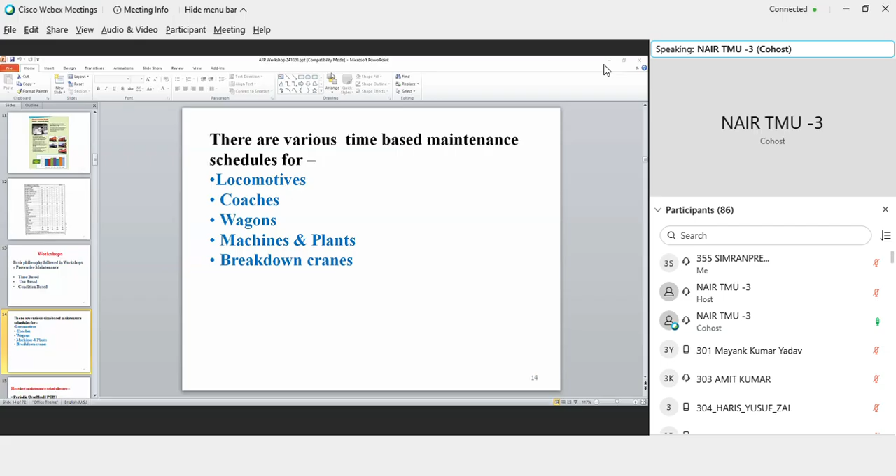The attention which is given during that period of time is much more than what can be managed in open line. Now, the basic premise is if the attention given in the workshops is good or it is at a higher level, then the open lines would face lesser level of problems because they don't have that much of time to attend to those repairs. If the maintenance which is being done in the workshops is not up to that quality, then the open lines will keep on having recurrent problems.

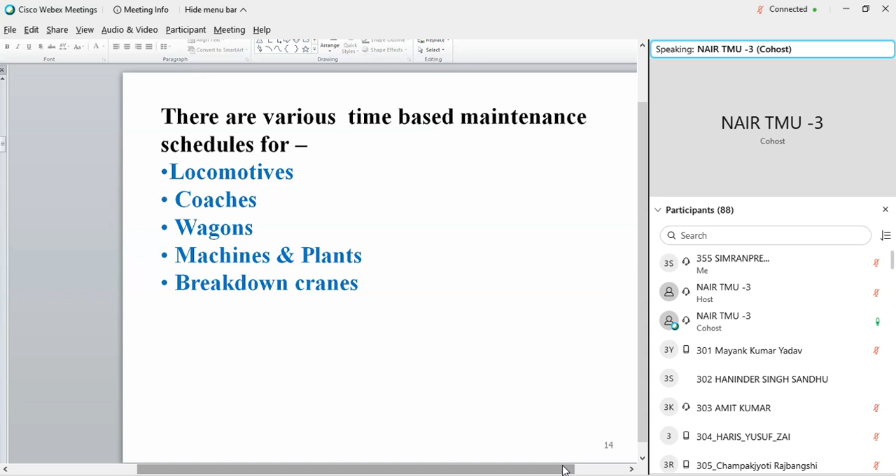Now, the workshops can be workshops dedicated to locomotive POH activities, coaches POH activities, or wagon POH activities, or it can be a mix. So, for example, Pratap Nagar workshop is a workshop which is dedicated to wagon repairs. You go to Secunderabad, the Lallaguda workshop is a workshop designed for coaches. Vijayawada, which is Rayanapadu, is designed for wagons. It can be a mixed workshop.

You go to Charbagh in Lucknow, you will find they do coaches, they also do POH of the electrical locomotives, the POH of DEMUs or EMUs also. So the workshops can be mixed or workshops can be specific, dedicated to a type of a rolling stock. There is a workshop, say Parel, which was dedicated only for POH activities of breakdown cranes.

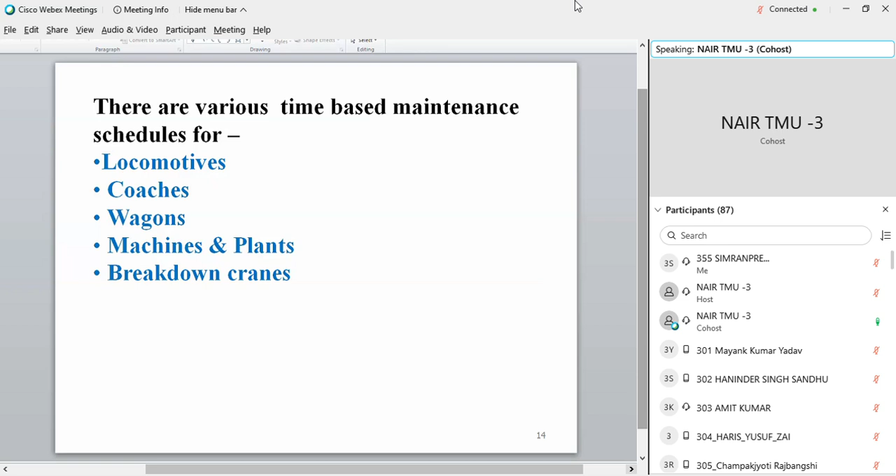Now the workshops are the places which also use a large level of M&P. So that is why I have written here M&P separately. They use M&P for their own use, and they also provide support for M&P maintenance for the adjoining division if it is there. So we do periodic overhaul and midlife rehabilitation in these workshops.

The workshops at the zonal level are headed by a person called CWE, or the Chief Workshop Engineer. If you remember the headquarters structure which we had discussed, there is a gentleman called PCME who is the head of the mechanical department. Under him, there is one gentleman called CWE, or the Chief Workshop Engineer. So say for example, Western Railway has a workshop at Pratap Nagar, there is a workshop at Bhavnagar, there is a workshop in Parel. So all these three workshops are coordinated by the CWE, who is sitting in the headquarters. Their day-to-day maintenance activities, any material support required, any policy decision required would be given by the CWE. At the workshop level, the head of the workshop is a CWM.

So there would be a Chief Workshop Manager at Pratap Nagar. There would be a Chief Workshop Manager in Bhavnagar. He is the man who is the head of the workshop at the workshop level. Now, the Chief Workshop Manager in turn has a large number of officers who are supporting him. So there may be a Deputy CME production. If it is a crane workshop, a Deputy CME crane, Deputy CME M&P. If it's a diesel workshop, Deputy CME diesel. Deputy CMM depot. The workshops use a large amount of material and they generate a lot of scrap. So you will find that major workshops are attached with stores depots.

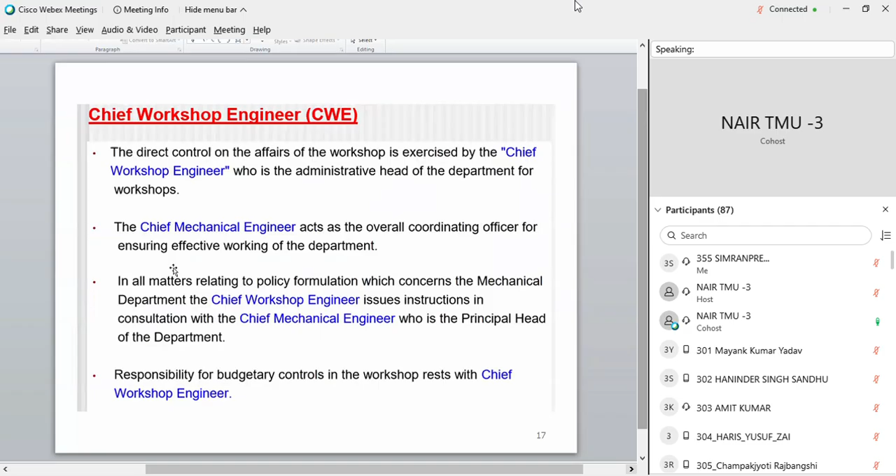So this is what the CWM does. The CWM is the in charge of the workshop, and a number of these basic activities keep on happening in the workshops. They may be repairs, manufacturing, M&P maintenance, production control, support staff of stores, electrical, accounts, personnel. So CWM is generally a big man.

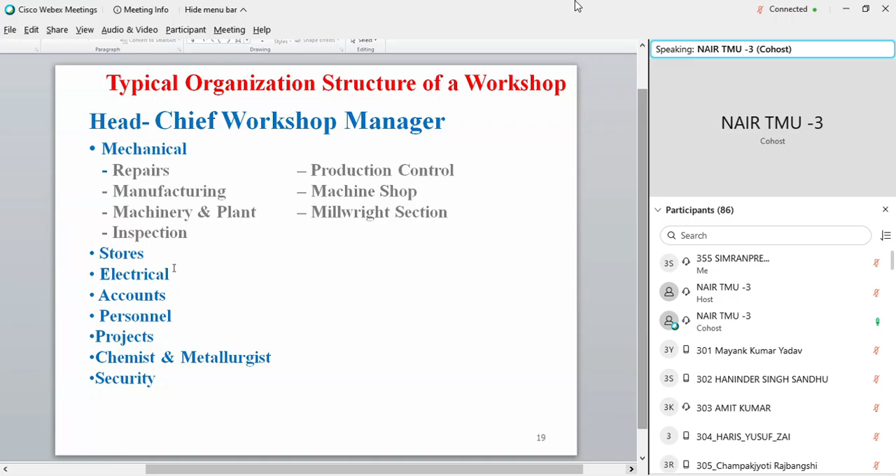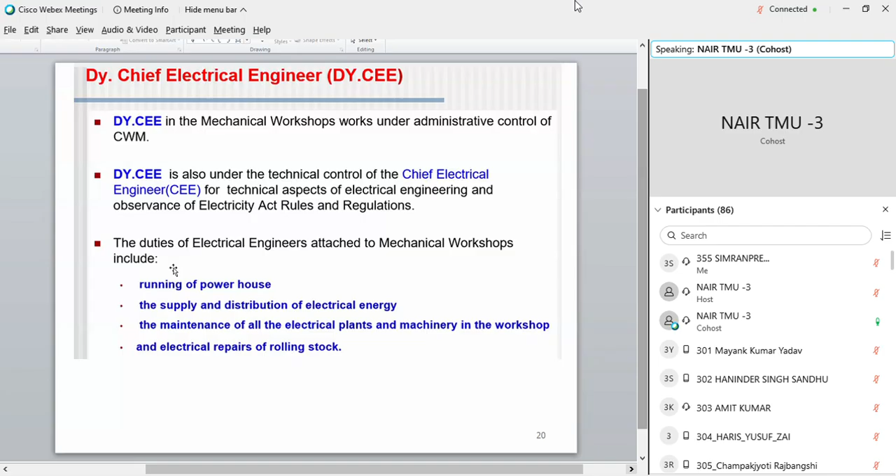CWM is conventionally an SAG grade post, and you will find that a large amount of activities are happening in the workshops, and different departments are assisting him. So there may be a deputy CEE who's posted in the workshop, and besides the general lighting, for example, in Charbagh workshop, if the electrical loco maintenance is being done, he would be assigned some work of the electrical loco maintenance also. The personnel works which are done by the personnel department, all establishment related matters.

Chemical and Metallurgical Testing Organization. This is a subsection of the mechanical department only, and this is a separate cadre per se. So there would be a CMT cadre across all the workshops. Not all workshops would have CMT organizations, but the major workshops would have CMT organizations.

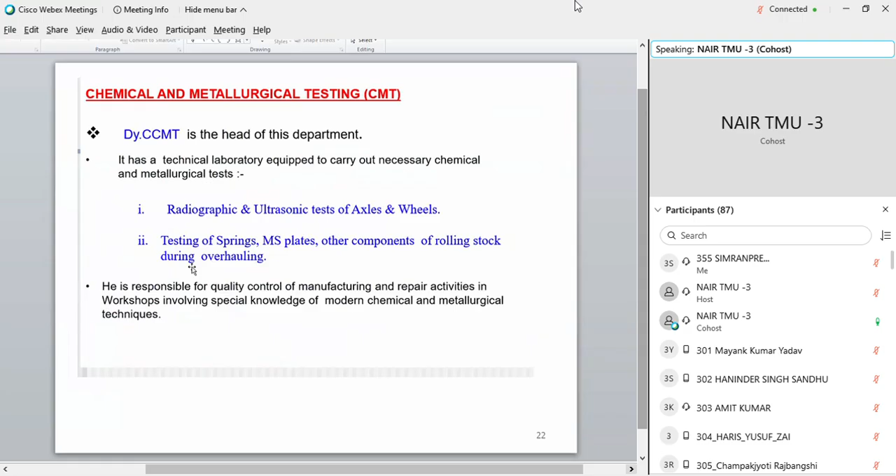There would be an accounts department, basically looking after the pay related issues of the people there, and also doing the costing activities in the workshops. Stores organization taking care of the material input, scrap sales which happen in the workshops. Union activities are, as I told you, they are hotbeds of union activities. Now workshop is divided into small shops.

So let us take an example of Pratapnagar workshop again, which is a wagon repair workshop. When you enter Pratapnagar workshop, you will find that there are a large number of small shops. So for example, if a wagon comes in, there may be a body repair shop, a shop which is only attending to the body repair. There may be a bogie shop, which is only attending to the bogie repairs. There is an air brake shop, which is attending to the air brake components. There is a cartridge roller bearing shop, which is attending to the axle boxes.

There is one M&P shop, which is attending to the M&P which is available in the workshop itself, or some small process of machining which is required to be done. So the whole workshop is divided into small shops, and each shop is headed by a senior supervisor or a senior section engineer who is supported with junior engineers, artisan staff, khalasis under him.

And the day-to-day maintenance of that specific shop has to be run by that senior supervisor. Again, the shops also are numbered because we have to attribute costs of activities which are happening in that specific shop to that shop only.

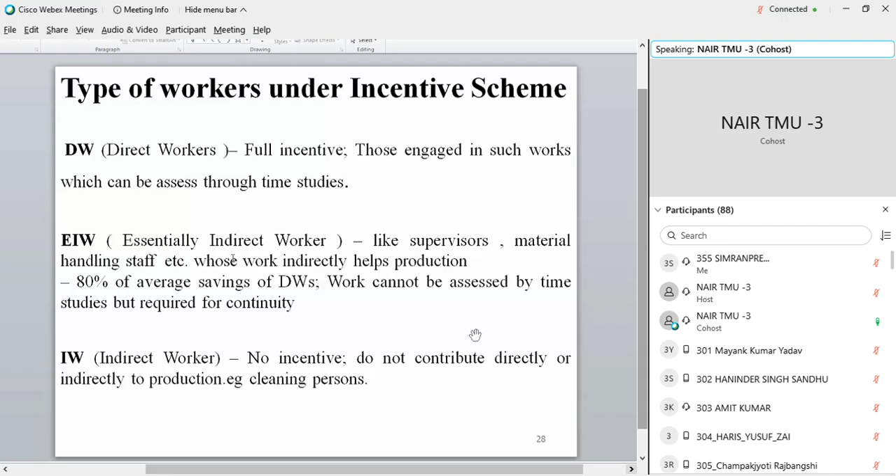The workshop would have something called a production control organization or a PCO, which is the most important section, and it is controlled by the production engineer or the deputy CME production. He is the man who is primarily responsible for ensuring that the production activities are happening in the workshop. There would be an M&P section basically looking after the M&P maintenance, and the balance whole workshop is divided into various shops which are controlled by individual senior section engineers. All the workshops are codified.

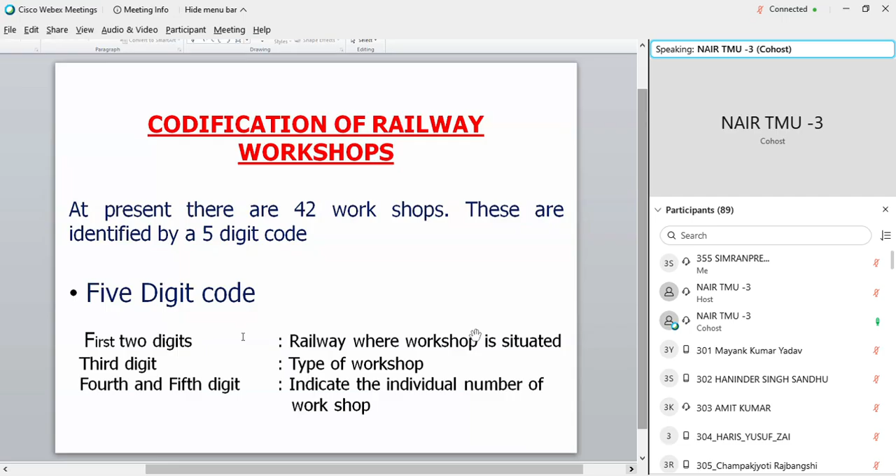This we just saw in the wagon PPT also. There is an organization called COFMO, Central Organization for Modernization of Workshops, which was set up in Delhi. The basic concept was that we wanted to modernize all our workshops. So a separate entity was created to give this input. Over a period of time, all the workshops have got modernized.

So this entity has diversified into procurement of M&P, because procurement of M&P is also very tricky business, and we wanted an organization who was competent to purchase M&P for use of Indian Railways. So COFMO was given this task of procuring M&P for the Indian Railways.

Now, PCO, I told you, is one of the most important sections in the workshops, and the production engineer is responsible for the PCO. And these are some of the sections which are covered under the PCO organization. So there is a progress office, there is a planning office, there is an inspection office.

Let us take an example that one Pratapnagar workshop has been told that you have to manufacture a design of a table and 100 numbers of that table. So once that demand has come on Pratapnagar workshop, what the PCO would do, they will make a drawing. So the workshops have drawing staff attached with them. They'll make a drawing, they'll make the specifications of the material which is required, and they'll issue this drawing.

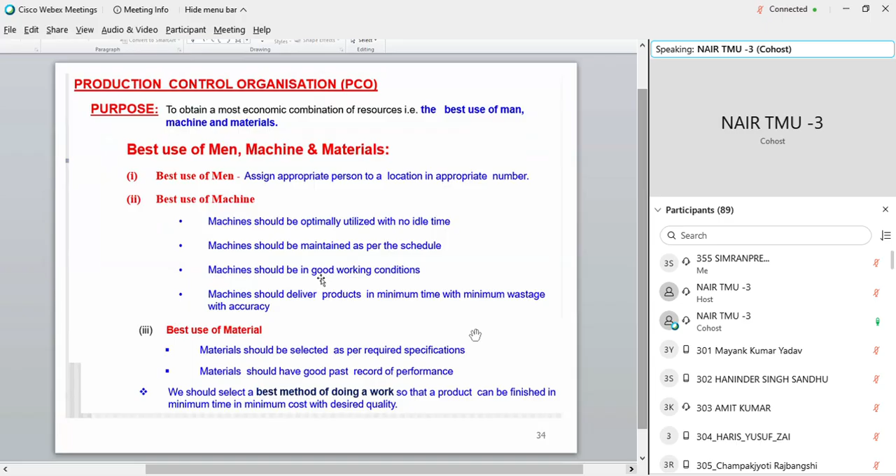So he basically ensures best use of men, machine and material. These are the main functions of the progress office. Issues a card number, specifies a date of completion,

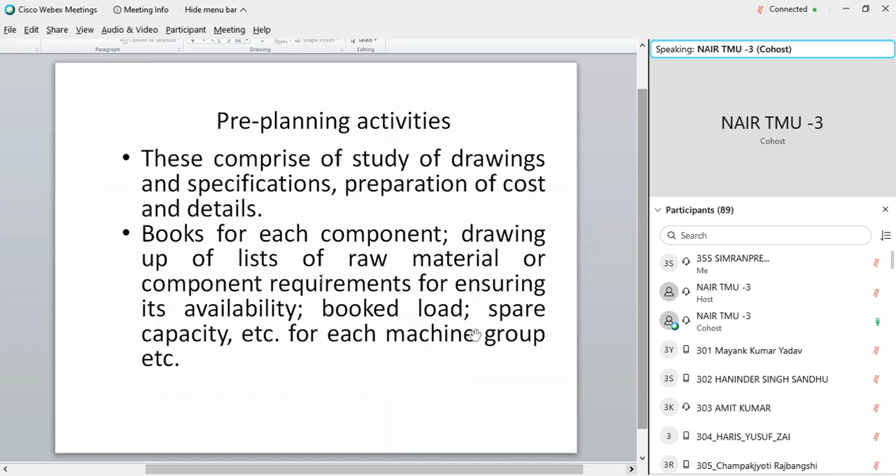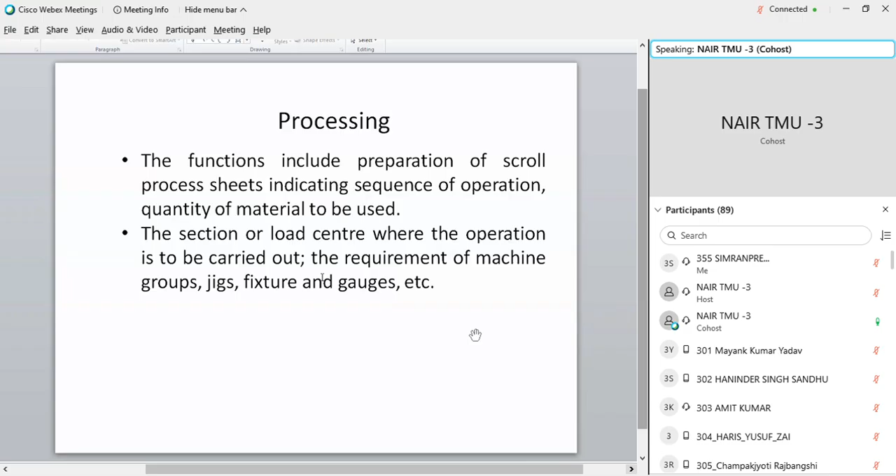pre-planning activities, studies, drawing and specifications, drawing office activities where he is issuing the drawing, planning activities, composition of activities where he is fixing rate, where he is fixing time, synthetic time he has fixed, then he does efficiency studies to establish whether the time he has fixed is okay or not. So these are broadly the activities which are happening in the PCO.

Then the next section, which is an important section, is the M&P section. In this section, basically, he looks after the procurement of all the M&P which is required in the workshop. We procure machinery in Indian Railways through a program called M&P program. And this section would be placing the demands under the M&P program.

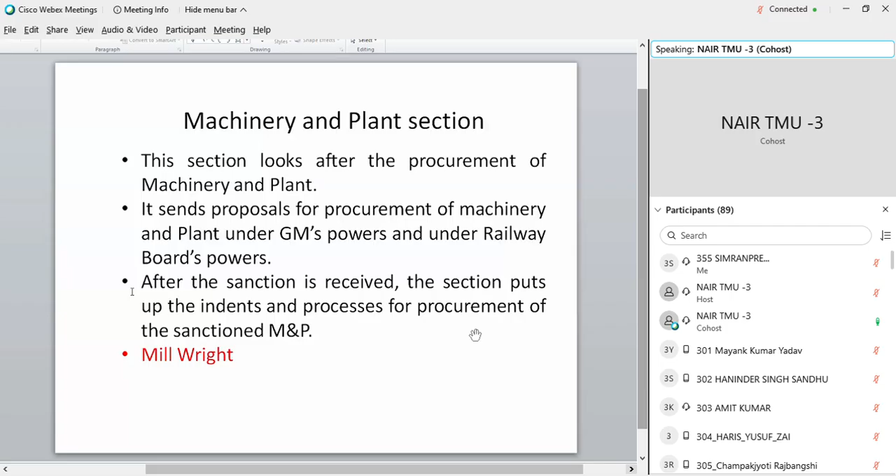We also have a section called millwright section. It's a name conventionally given to a section because they are involved daily in the maintenance of the M&P activities. It is thought their competence level is higher. So assuming in an associate bridge shop or in an electric loco shed, the overhead crane has gone under repair. So they will request the millwright section of the closest workshop, that look, you send me your millwright staff to attend to my EOT crane.

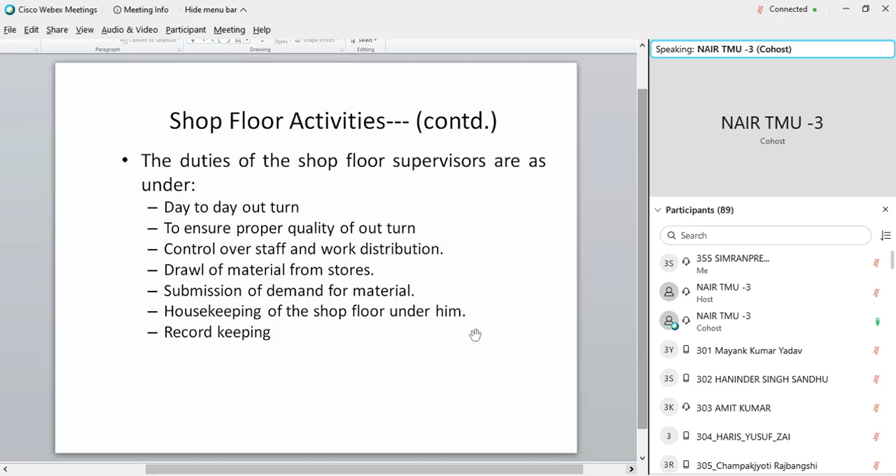Plus the shop floor activities where the SSEs are managing on a daily basis the day-to-day operations, what is the day-to-day outturn which needs to be given, whether the quality of the outturn is proper, control over staff and drawl of materials, etc.

Now each workshop, when you enter a workshop, you will find there is a time office. Time office is where the attendance of the staff is maintained. So they are supposed to punch in a card and punch out a card. We have tried to automate it by using biometrics, but this concept has not been very much liked by people, because once you have to go in for biometric attendance, you have to be available in the workshops.

So Pratap Nagar is one workshop which has been successful in implementing biometrics at all the 4 times of the day. This is a step in workshops when you're dealing with 3,000 people. Any decision, you have to take 2 steps forward and 1 step back. It's an activity in process. Some workshops have come up to the level where they have said that at least you do biometrics at the morning time of the day.

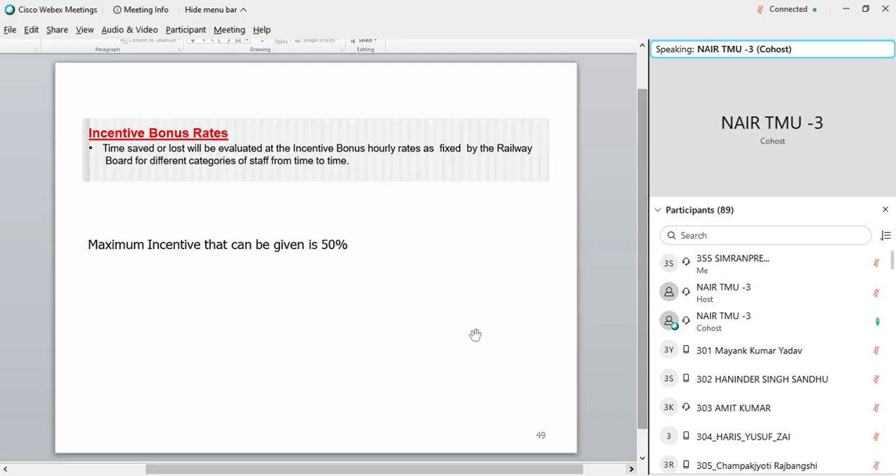Now, I told you that all the workshops get incentive. The maximum incentive that can be given is 50%. Incentive is in terms of money. All the workshops are covered under an incentive scheme, and a worker can earn maximum incentive of only 50%.

This was the logic as to why the incentive scheme was launched over Indian Railways. The workshops were told that you increase your productivity, we will not give you additional manpower, but you start giving me more output. The worker has the benefit that if he works slightly better, he gets more money. The basic logic in incentive scheme is that his basic wages are assured. So his basic wages will always be assured, and if his productivity improves, he starts earning more money in terms of incentives.

Now there are 2 types of incentive schemes over Indian Railways. One is called the Chittaranjan type incentive scheme, and second is called the group based incentive scheme. Chittaranjan based incentive scheme was the first scheme which was launched in 1960 in Chittaranjan, and basically again the principle is time. So there is something called allowed time. We have a method by which we fix an allowed time, and we see what is the time taken, and the time saved is what gets converted into incentive.

Now, what happens in the workshops? The misuse happens while fixing the allowed time. So you have to keep a watch on the allowed time which has been fixed for an activity. Say, for example, I had given 4 hours for an activity where 4 buffers needed to be dropped. They had to be overhauled and they had to be refitted back. Over a period of time, this activity got changed, and I am now getting overhauled buffers from the market. I simply have to drop and fit.

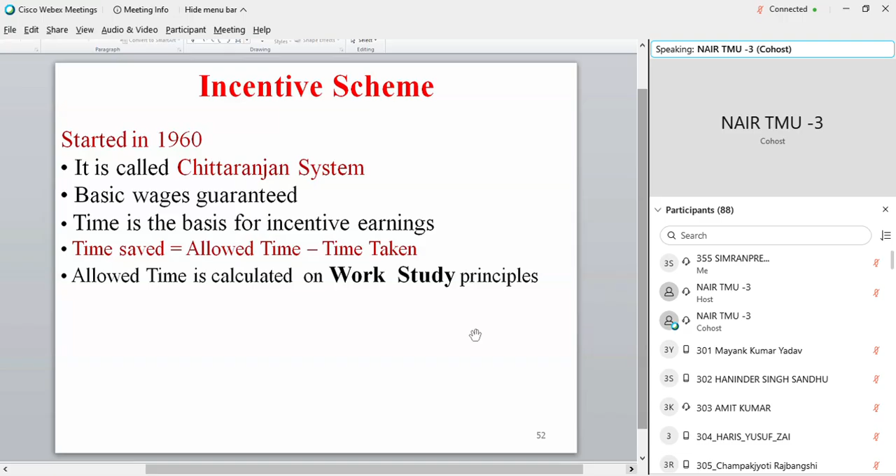The Chittaranjan scheme was the first formal scheme, and the Chittaranjan scheme is an individual-based scheme. So for example, in that example of shop 1, shop 2, shop 3, if the shop 1 fellow is saving a lot of time and the Chittaranjan scheme is applicable, then he is earning money. The item has gone to shop 2, and the shop 2 fellow is not earning incentive, is not saving time. So what will happen? In totality, even though I have ended up paying incentive, the outcome or the productivity of the workshop as a whole has not improved.

So because of that, a group incentive scheme was launched where it was said that we pay you incentive only when as a group the outcome improves. So in the Chittaranjan pattern, if the shop 1 fellow is doing a good job, he will earn incentive independent of what the shop 2 or the shop 3 fellow is doing. In the group incentive pattern, only when shop 1, shop 2, shop 3 fellows as a group have improved the productivity will they earn incentive, otherwise they will not earn incentive.

Now, the allowed time we give for a component is fixed in such a pattern that an average good worker will end up getting 33 1/3% of the incentive. So the allowed time has that much of a gap that if an average worker is working and using that allowed time, he will be able to earn 33 1/3%.

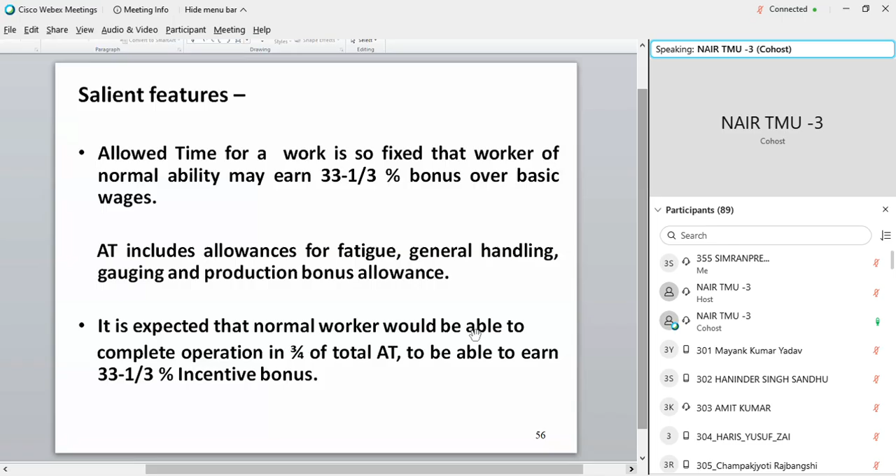In the process, when we fix allowed time, there are some allowances which are given. The allowances can be fatigue allowances, general handling allowances, gauging allowances, and he is also given the flexibility to book idle time. If he is idling for non-availability of tools, or there is a power cut, or the machine has a breakdown, he can book idle time also. So the worker is not penalized in any way that he is not able to earn incentive.

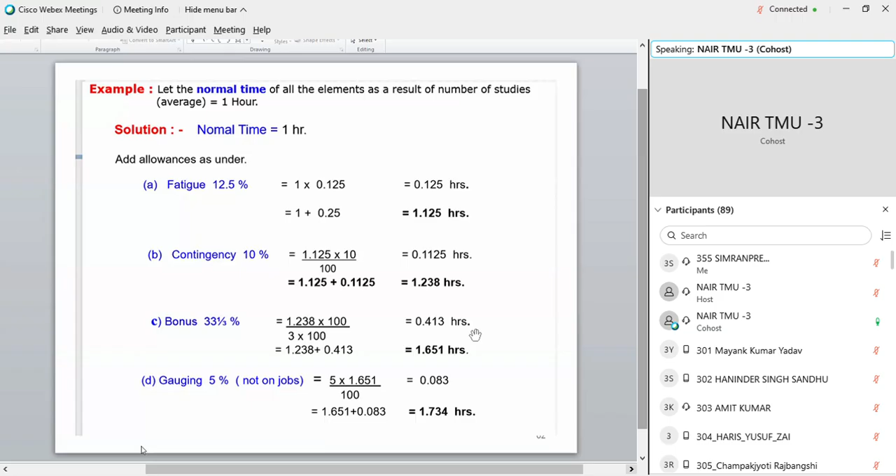Now, this is the group incentive scheme which was introduced in the workshops after a study by RITES, and subsequently this group incentive scheme has been implemented in all the workshops. This is a worked example of how we fix the allowed time. Assuming the normal time taken for the component is 1 hour, we'll introduce some percentages for fatigue, some percentages for contingency. Bonus means the incentive which has already been built in. Gauging on the job is the gauging activity being done. And the allowed time for this job is, say, 1.734 hours.

We know that with this allowed time, an average worker would be able to finish it in 3/4 of the time. And he would be able to save 0.433 hours, so that his average incentive earning would be 33 1/3%. If he is a good worker, he can save more time, but the maximum limit of time saving permitted is 50%. We do not pay more than 50% incentive. So this is the worked example from which you can get an idea of how we fix the time so that an average worker will always end up earning 33 1/3% of the money as incentive.

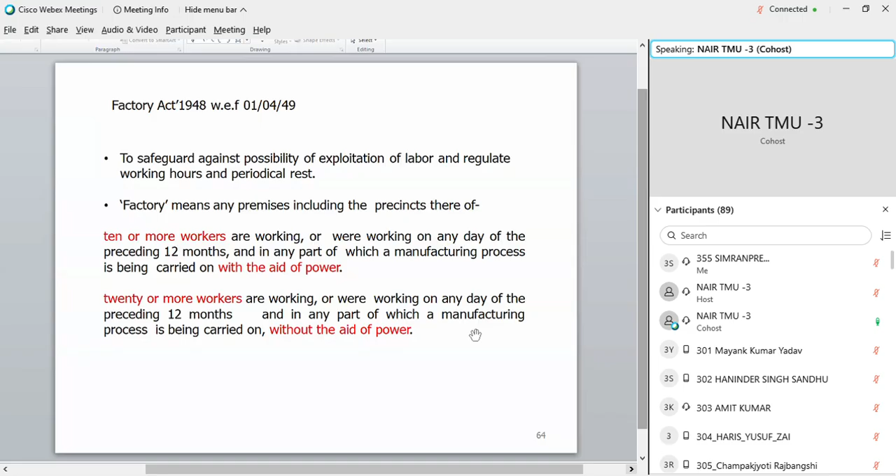Now the workshops are covered under the Factories Act. The Factories Act stipulates that the CWM is the principal occupier of that factory. So if anything unusual happens inside the factory, the CWM is directly responsible. For example, in the Rayanapadu workshop in Vijayawada, a compressor burst and 2 people died. So the state factory inspector gave a legal notice to the CWM asking why action should not be taken against you as an individual, because you are the principal occupier of this premises and such an unsafe operation has happened in your premises. So under the Factories Act, the CWM is the occupier of the factory or the principal employer of the factory.

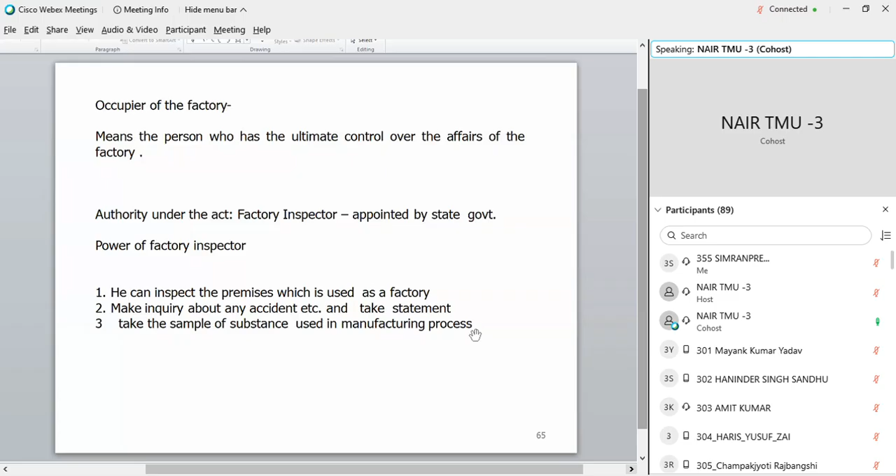Also in the workshops, we do costing of the components. For example, again taking that table, there are direct material and direct labor costs. Beyond that, there are some overhead costs, also called on-costs.

You will see that a table which is costing outside in the market 1,000 rupees, if you manufacture it in a railway workshop, it is priced at 1,700 rupees. So that 700 rupees is overheads, and there are various overhead costs which come into play.

Because of the high overhead costs, the workshops also keep on doing something called a decision of make or buy: whether we should manufacture it in-house or whether it is better to buy it from outside. This make or buy decision is more predominantly taken in production units, and that is one of the methods by which we have been able to increase our productions also, where we have said that we will go in more for buy rather than make.

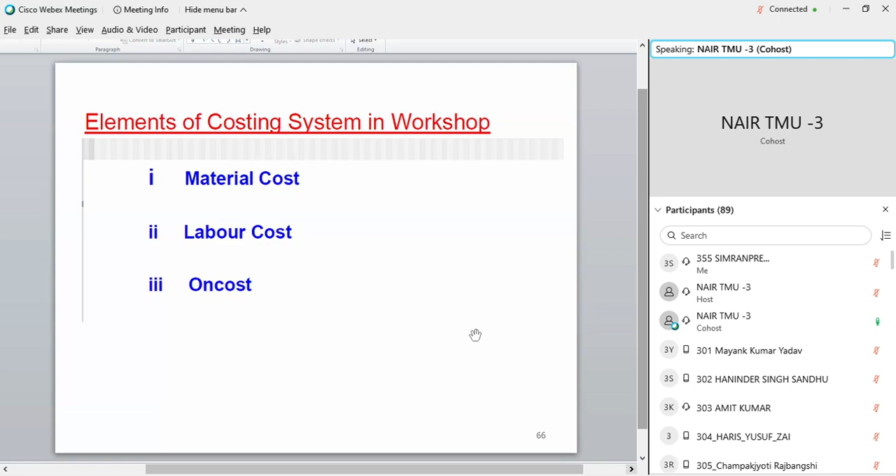Now, this is a fine mix because you have to keep in mind that the people who are available in the workshop also need to be loaded with work. If you don't give them work, they will not end up earning incentive, and then there would be a lot of hue and cry. So what are the components of these on costs or overhead costs? The first component is called the pro forma on cost, second is general on cost, and third is shop on cost.

Now what is pro forma on cost? Pro forma on cost is a generic cost. For example, in Western Railway, I told you there are 3 workshops and there is a CWE organization which is sitting in the headquarters. Now, the CWE organization is comprising of 100 people or 60 people. It's a cost which is being incurred for maintenance of these workshops only. So, a percentage on the direct labor and the direct material would be marked up on every item, equivalent to the cost of this CWE setup in the headquarters. So that is called pro forma on cost.

Second type of cost is general on cost. Say, for example, in Pratapnagar workshop, you have a centralized air compressor and you are using pneumatic air through pipelines to individual shops. That pneumatic air is being used for manufacturing or repair of the components, and you are not able to earmark which specific activity consumed how much air. So the costs of these kinds, which cannot be attributed to a specific component but have been used across the workshop level, are called general on cost. And again, as a percentage on direct labor and direct material, we will upmark the basic cost with general on cost.

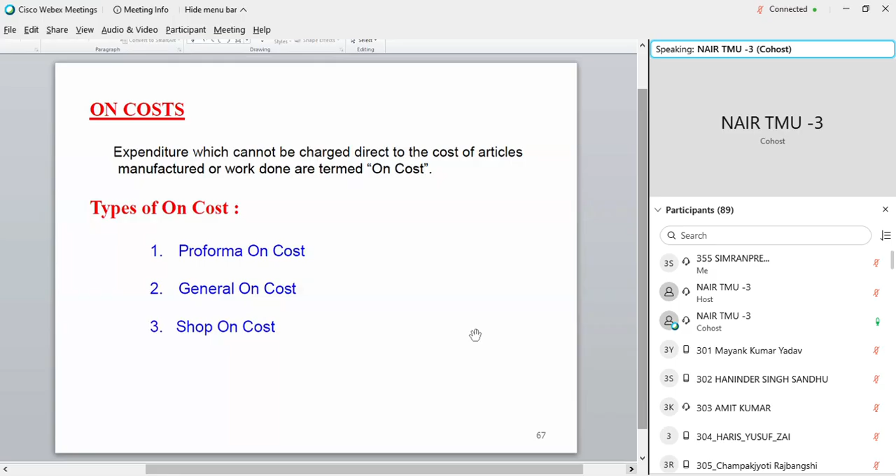Now, besides workshops, we have production units: CLW, DLW, ICF, MCF, RCF, and these production units are involved in manufacturing activities. Now, how do these production units know what they are supposed to manufacture and what they should be prepared to manufacture in the next 1 or 2 years? The lead time of procurement of material over Indian Railways is a long drawn process because, first of all, in the market there is no ready availability of some kinds of components which are specifically used for Indian Railways. So the market also needs time to manufacture those components.

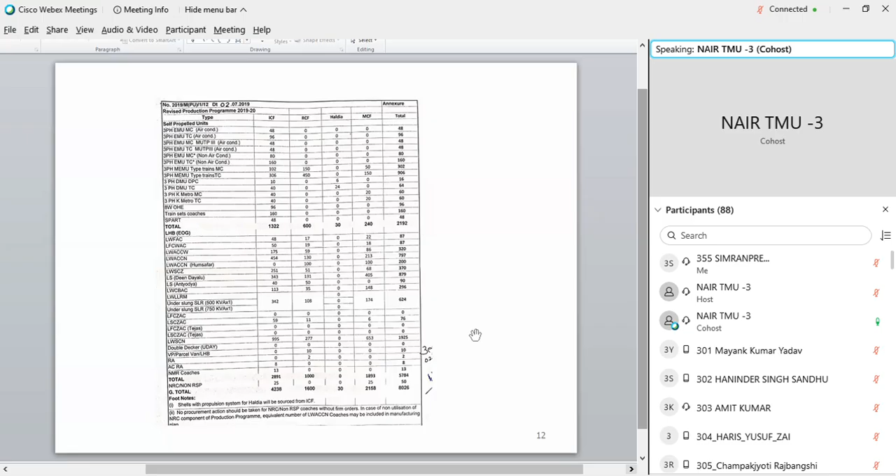Who heads the traction machine workshops? There would be a CWM again. The CWM need not necessarily be from mechanical. If it's a mechanical workshop, there would be a CWM from mechanical. If it's an electrical workshop, the CWM would be from electrical. If it is a bridge workshop, there would be a CWM from the engineering department.

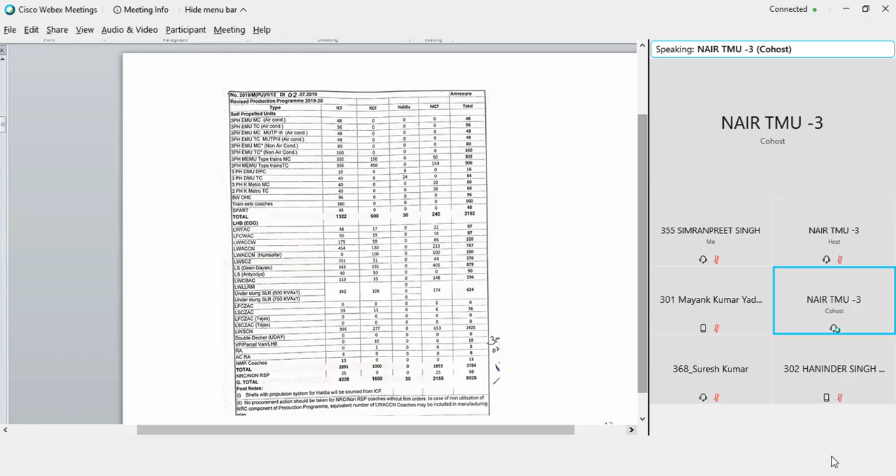What is the basic difference between mechanical and electrical workshop? Not much of a basic difference. Only thing is, conventionally till now, the mechanical workshops were dealing with coaches, wagons, and diesel locomotives. For example, Mahalakshmi is an electrical workshop, so the CWM is an electrical officer. He is dealing more with maintenance of EMUs and MEMUs.

Otherwise, an EMU would come and be attended to at the same level as a coach coming to a mechanical workshop. Only difference is Mahalakshmi would have more sections dedicated to transformers and traction motors, as compared to a coaching workshop which may have more sections dedicated to air brake and bogie shop. Otherwise, the structure and the working in the workshops would be more or less similar.